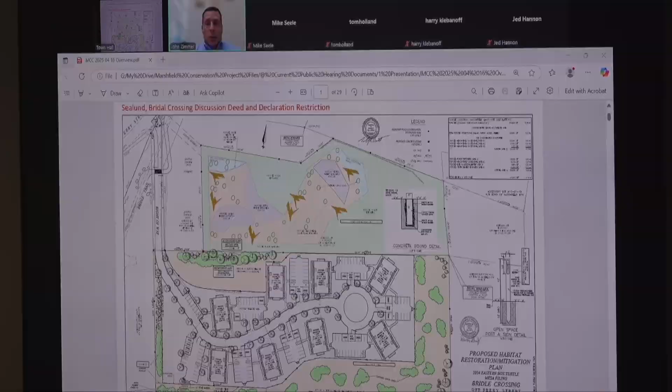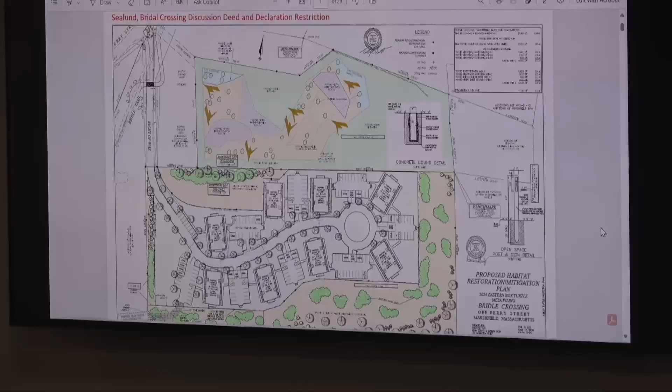There was originally work done back when Mr. Armstrong owned the property and was looking to put soccer fields in. This is a new application with Natural Heritage for the proposed project. So if you'll see on the site plan here, there's the development area to the south, and then you can see the shaded area basically around the remainder of the property. So what we've done for mitigation for the species is take the acreage that's affected and then multiply that by 1.5 to obtain an acreage of habitat that's to be protected in perpetuity and improved.

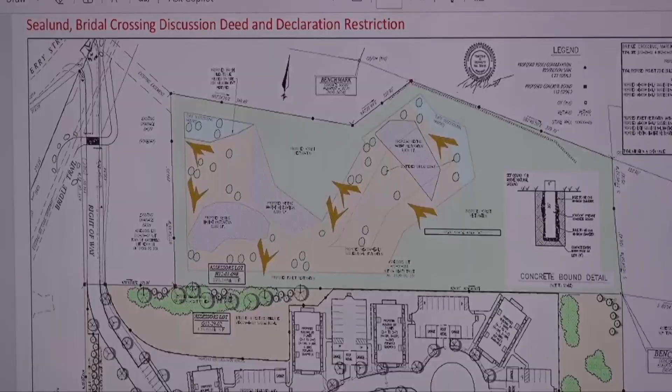So the area that you see to the north right now, I'm not sure if folks have been out to the site or not, but it's not great. It's been worked over. There's a lot of debris out there. It's not excellent habitat for eastern box turtles. There are turtles out there for sure. I did find, I think it was 10 or 12 of them out there last year when I did surveys to

clear the project area. But what we're proposing to do in working with Natural Heritage is to improve the habitat within the property. So you can see those light green shaded areas. The gray areas are going to be protected nesting habitat. There's going to be some structure added out there. And then there's going to be a variety of other habitats from meadow through mid-successional and then forested habitat, so that at the end of the day, you're going to have a mix of habitat that's going to be protected and managed in perpetuity, to allow for that habitat for the turtles to be maintained.

Part of the conservation and management permit process is ensuring that those acres are protected basically in perpetuity. There's a couple different mechanisms to do that. One of them is a conservation restriction on the property, and we did look at that. It's oftentimes very difficult to find an entity to hold the conservation restriction, as the commission may be aware.

The other option that we looked at and are proposing is to basically deed over that entire shaded area to the Conservation Commission. So basically create a separate lot and donate that to the commission. We did provide some documentation to that effect along with the metes and bounds plan.

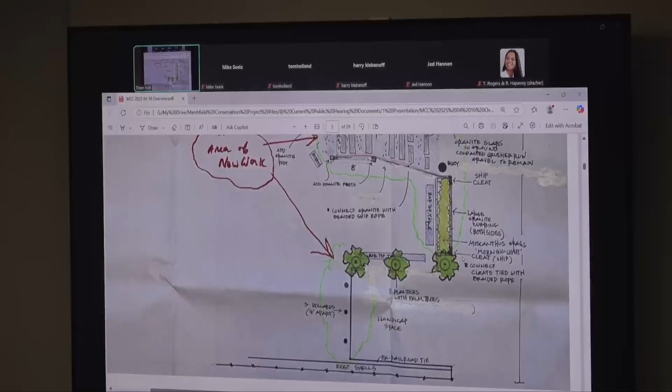And then there are also some bollards and, what do you call them? Mooring cleats, like large kind of antique mooring cleats, to be used as fencing as well. There's no real changes to the impervious table for this project, as they're asking to keep the compacted bluestone type gravel on the property. Okay.

So I went out there, I don't really have an issue with this. The only thing, you mentioned a comment about they're going to be using the reclaimed asphalt on the walkway area, so between the granite slabs. And that was the only real concern, because over time that can become just as impervious as regular. But there's no one really here to discuss this with. Yeah.

So, do you have a set of the building commissioner's comments? Yes. He also had a concern about the bollards and the cleats and the planters, I believe, being able to be moved around in potential flooding. I know in the package, though, they did say that they were going down a certain amount to actually secure them. But I don't know if that was for everything, because also in the package, it did say that the planters were movable. They're pretty large.

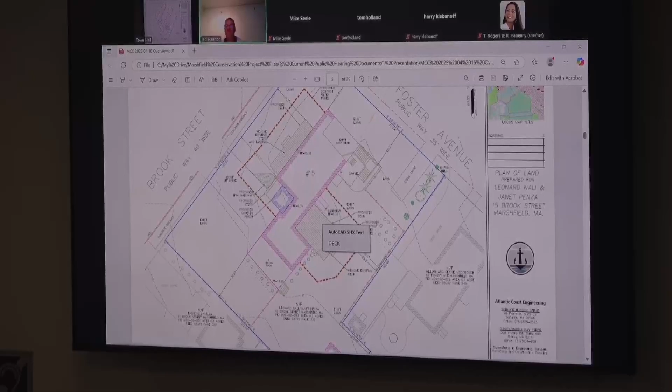And then there's some increase in proposed hot mix asphalt, and you can see that hatched in green. There is a minimal increase in impervious due to the proposed covered porch entry and the hot mix asphalt. That's really the scope of the work. Very, very straightforward. I'd be happy to answer any questions you might have. Thank you. Thank you.

All right, Mike, do you have any comments? Yes, the property is located within an AO flood zone and across the street from a mapped barrier beach coastal dune. Unlike other properties around this area, the parcel is entirely disturbed, meaning the whole parcel's been grass for quite some time, maintained lawn area, and the decks are proposed to be supported by sonotube footings, and they would be expanded to the dimensions that you can see on the screen here.

Okay, and the building commissioner has no issues with this project. Right. Okay, so I think I had read it differently on the notes, but the front porch here is actually a completely new deck. There's no deck out there right now. That's going to be a 30 by 8. And then in the back, that deck's going to be removed and then redone a little bit larger than the existing.

And then the mudroom, I'm just kind of talking out loud here, but the mudroom, that's an addition with the covered porch on the front of that. Do I have that right? That's correct. Okay. And there is a 357 square foot increase of impervious structures. Is the concrete driveway that's out against Foster Ave their driveway, correct? So they have two?

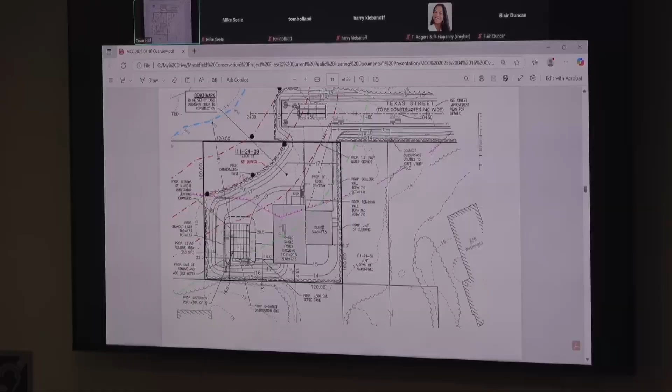On the plan here on the screen, you'll see at the top left of the page is highlighted in blue. That's a bordering vegetated wetland that was delineated by Brad Holmes, who's a professional wetland scientist. That BVW contains runoff, which ultimately conveys through a culvert underneath Wellington Ave, and then conveys out to the salt marsh associated with the South River.

The proposed work on the plan here, shaded in gray, is the proposed home location. The home itself is 76 feet away from the BVW at its closest point, and the limit of work on the lot associated with the single-family home is located a minimum of 50 feet from the BVW. The lot would have its own on-site septic system and would be serviced by municipal water with a connection out to Texas Street.

The Texas Street road improvement is a 20-foot pavement, which would start on Washington and extend in approximately 175 feet to access this lot. The 20-foot wide pavement has a Cape Cod berm on each side, has 2 catch basins, a particle separator, and subsurface leaching chambers to comply with DEP stormwater standards.

For mitigation, at the down gradient limit of work, we've proposed erosion control barriers. We've also proposed conservation posts within the limit of Texas Street at the 25-foot setback for Texas Street and at the 50-foot setback on the residential lot.

I'm going to turn it over to you for questions or comments. I do expect that we will be continuing this hearing, though. We are going to the zoning board next week, and we have a date in early June with the planning board. So I'd look to continue to your early June meeting, conclusion of tonight. Okay, thank you. Thank you.

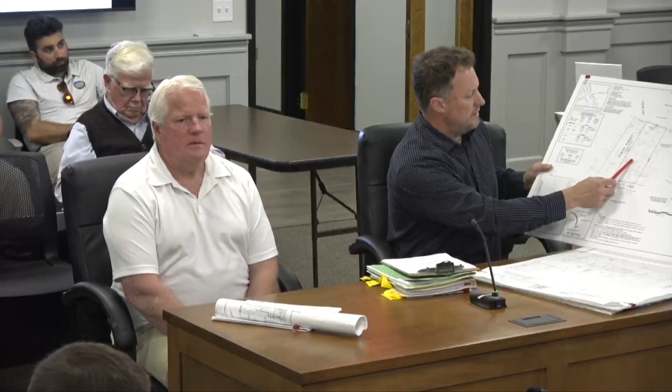Okay, so the proposed work is in Barrier Beach, coastal dune and land subject to coastal storm flowage, and also in flood zone AO3 and VE 18. And you're here to present. Hello, my name's Paul Lauterbeck. I'm with Merrill Engineers and Land Surveyors. I worked on this project with our PE Dana Altobello. This is Arthur Hale, the builder constructing the project, and Joan, the property owner. So the existing lot is a single-family house right on Brant Rock Beach, with North Street to the west, Bryant's Lane to the right, and another residential property to the east.

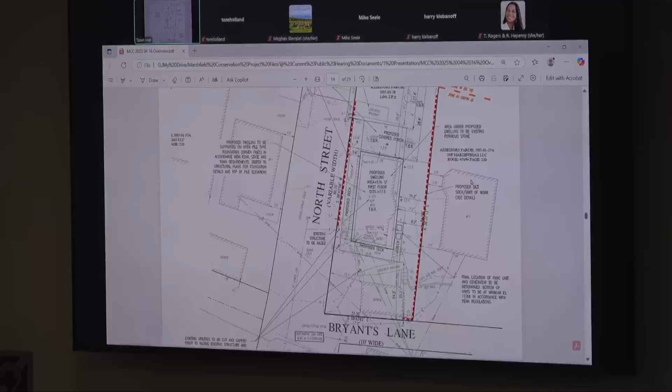Like you said, it's in a flood zone, AO depth 3. The applicant is proposing to raise and rebuild the existing dwelling, supported on open driven piles, 4 feet above the existing elevation as required, 3 feet for the AO plus another foot. The first floor elevation at approximately 17.6. The existing dwelling is connected to town water and sewer, and it will be reconnected.

The new structure will be less non-conforming. It's currently non-conforming, and Arthur is going to be going to ZBA. Historical was approved last night. Approved last night? Historical was. Historical was approved last night.

We're reducing the impervious area because the existing house has a covered porch that wraps around the whole way, and the proposed has a covered porch at the back, but as I understand it, the deck will be open around the side. The material underneath the house will be pervious stones. The existing material that's on site will be used underneath the dwelling, and erosion control measures will be in place, set up prior to construction. Do you have any questions or comments? Thank you.

Yeah, I went out to this location. It's a great little house. I loved it. So, obviously this will be an improvement and more in compliance. Mike, do you have any comments?

Yes, the footprint of the home will be located within the AO flood zone, and portions of the property near the seawall are in the VE flood zone. The proposed foundation will be driven wooden piles with a minimum of 3 feet of clearance to allow for flowage of water and dune materials. The garage and rear concrete walkways are proposed to remain. There are patches of old concrete by the seawall as well. The patches of concrete by the seawall, the commission could choose to have those removed.

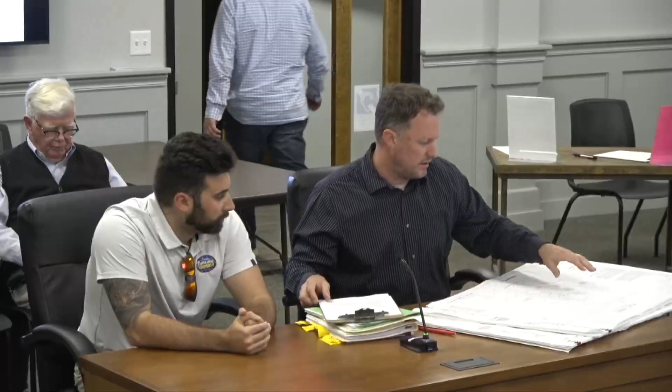Yeah, my name's Paul Lauterbach again with Merrill Engineers, and I'm presenting the project at 535 Plain Street with Nick Bercoloni and Chris Morrissey. Basically, the project is located at Brightway Car Wash at 535 Plain Street. It's approximately 1 acre of existing car wash facility, driveway area, and existing subsurface drainage galley systems, which was part of a DEP discharge permit project. The proposed project is pretty straightforward. It's just the installation of 2 underground proposed 5,000 gallon processing tanks to increase the total suspended solid removal on the site.

So really, the project is just digging 2 large excavations, putting the tanks in, backfilling and repaving the current pavement area just in the vicinity of the disturbed excavations. All the proposed work is underground below the existing pavement. No changes or increase in the impervious area on the site is proposed. All of the existing stormwater conditions will remain exactly the same post-construction, and there will be no increase in peak rate or runoff or any volume exiting the site. All the existing stormwater management process and maintenance will remain in place. And that's pretty much the extent of the project.

Yep. I went out to the site, it's off to the left side of the structure, it's already, I think it's concrete. Yeah, it's a concrete pad that's back there. So essentially, you're gonna dig up the area, put in the two 5,000 gallon tanks, pave it over, so that's no change in impervious. There's a big fall off to the side bordering the wetlands area, but the area is currently paved, no change to the existing surface, it's an improvement. No increase in impervious surface, no change to water runoff, so it looked pretty straightforward to me. The building commissioner didn't have any concerns. Any commissioners have any questions or comments?

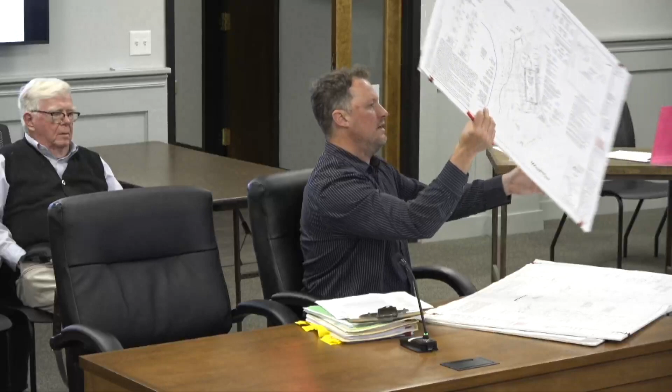The infiltration trench treats about this much area runoff. Now, this pocket wetland will pick up approximately this area, and this one this area. We're treating with a sediment forebay on the pocket wetlands, as you can see on the details. The runoff goes into the sediment forebay, works its way through the pocket wetland to a riprap stone weir, which controls and treats it. This provides 80% TSS removal. We revised the stormwater report to explain the 10 standards we were meeting, and that was the extent of our revisions.

Are there any questions? Sam, you had some questions on the calculations. Yeah, I think this is an improvement to what was originally proposed, and the town engineer echoed what I was saying in the meeting. The site's very constrained with groundwater and the location of the existing improvements. It's more in line with what we want to see on projects. Currently there was no treatment of the runoff, and now with the infiltration system and the 2 pocket wetlands, that has improved.

We also explained in the letter that the new building's almost 9 feet away from the wetlands, whereas the existing building is about 3 feet, and we're reducing the building footprint within the 25-foot buffer. So we're bettering the situation with the distance to wetland and the area of building inside the 25-foot buffer that Rod mentioned. That helps in the mitigation. My opinion is that with these changes, it's a big improvement over the existing conditions. So, I'm happy with it.